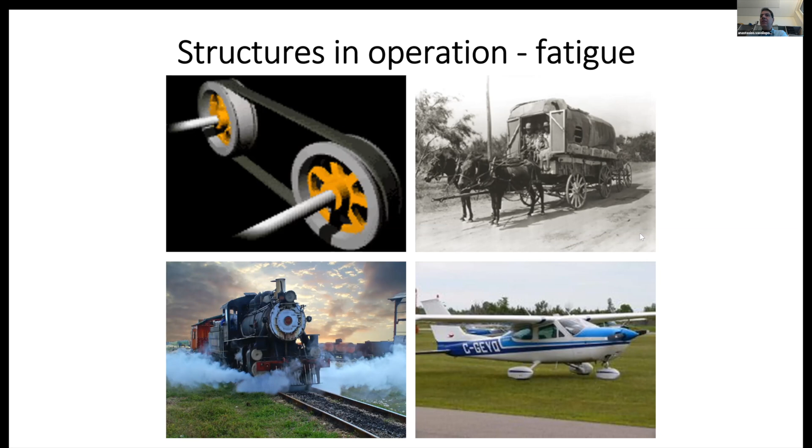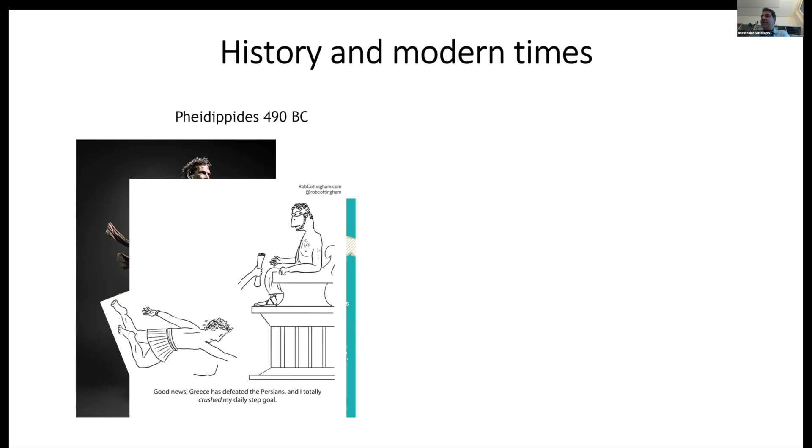He says, Greece has defeated the Persians and I totally crushed my daily step goal. And then he died. So he was a very good runner. Why did he die? Can anyone tell me? Fatigue. Yes, fatigue. But what I mean is, why could he run so many kilometers and die after all this? In reality, in our life we run more kilometers than him, but we don't die because of this fatigue. So what is the difference between these two elements? He was running continuously, not making a break. Exactly, he was running continuously, so he was not getting any rest.

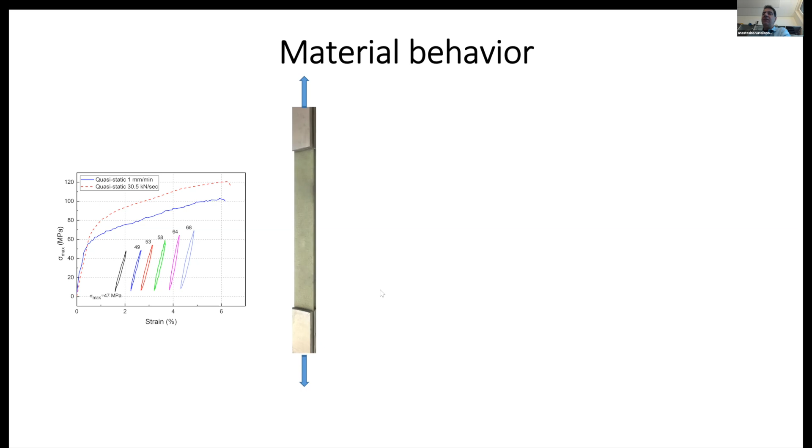Now it's better. Okay. So now we come to the material behavior, and as we said before, materials behave like humans, so they get fatigued. And the investigations that we are doing are exactly to understand this. We torture the materials, and we try to understand their fatigue behavior, how they behave under fatigue loading.

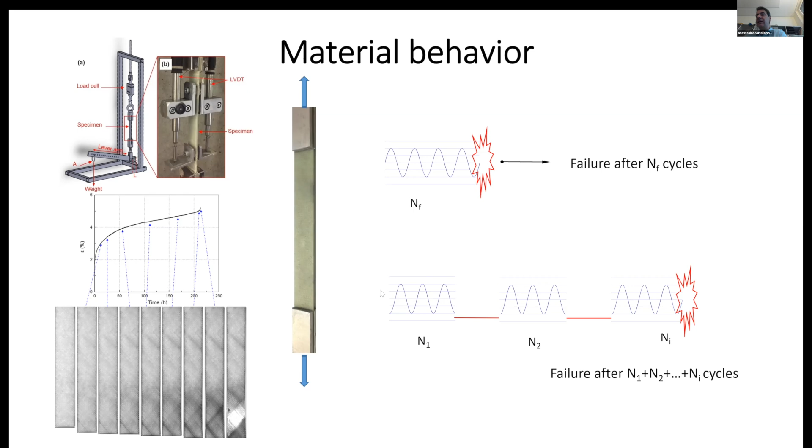And in exactly the same investigations as we did before, we now have the proof that if we load the material in a continuous way, the material will fail after a number of cycles. If we load the material at the same stress level, but we interrupt the loading at specific times, then the material can support many more cycles. So this means that the material itself has a mechanism of relaxation. When we unload it, and this is specifically for composite materials, but we've seen it also in other types of materials, it has a kind of mechanism to relax and regain, if you like, a potential for additional lifetime.

So what is fatigue? We introduced it somehow, but what is fatigue? Can someone answer? I know someone that has had this problem for a long time. What exactly is fatigue? It's accumulated damage under cyclic loading. Accumulated damage. Anyone else?

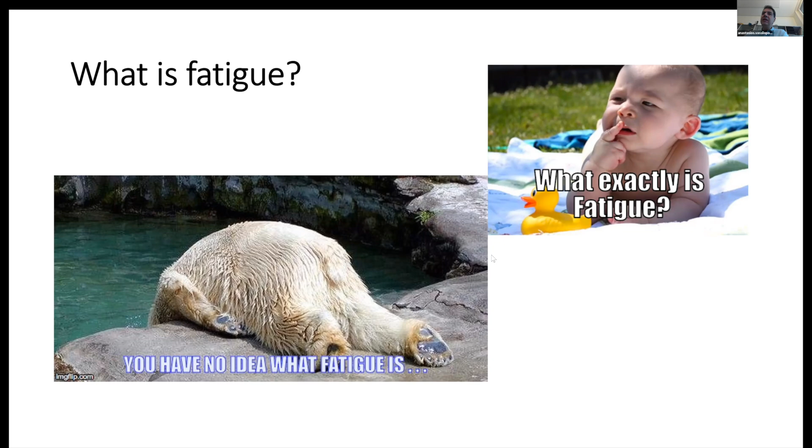Actually, today, although we have investigated fatigue for 200 years, we don't really know what fatigue is. We still try to understand, we still try to realize why fatigue is important, but still we do not know. Fatigue was introduced in the dictionaries, starting from the ASTM, the American Society for Testing and Materials dictionary. We have a definition only in 1946 or something like that, where they define the phenomenon under which properties of a material are deteriorated or degraded due to cyclic loading. Exactly as you said before, we have accumulation of damage,

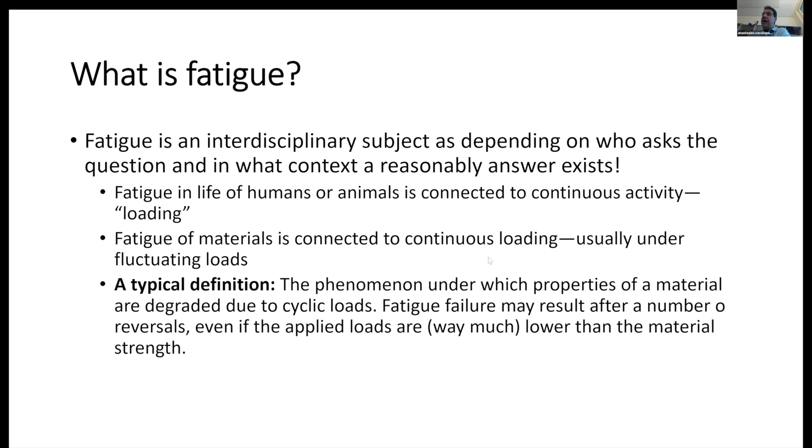not necessarily structural damage, but it might also be viscoelastic damage to the material. And this reduces the material properties during time. So you see, I have now introduced 2 different terms. We have load and we have time. So fatigue is actually a combination of structural damage and viscoelastic phenomena that work together, synergistically, to damage the material itself and lead the material to failure.

So we said failure. I just said before that we have investigated fatigue for almost 200 years now, and still we don't know a lot. This means that even today, fatigue failures continue to occur. We have a lot of examples of failures today that can be attributed to fatigue. And actually, there are a lot of investigations showing that 80 to 95% of structural failures are due to fatigue or fatigue-related phenomena.

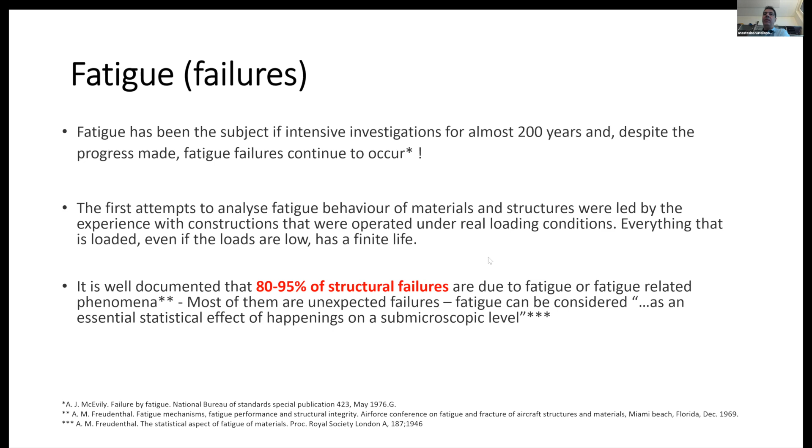We'll see also later on some of this, but only to clarify the terms. So we said 200 years, and if you see, we have the early fatigue failures already observed almost 200 years ago.

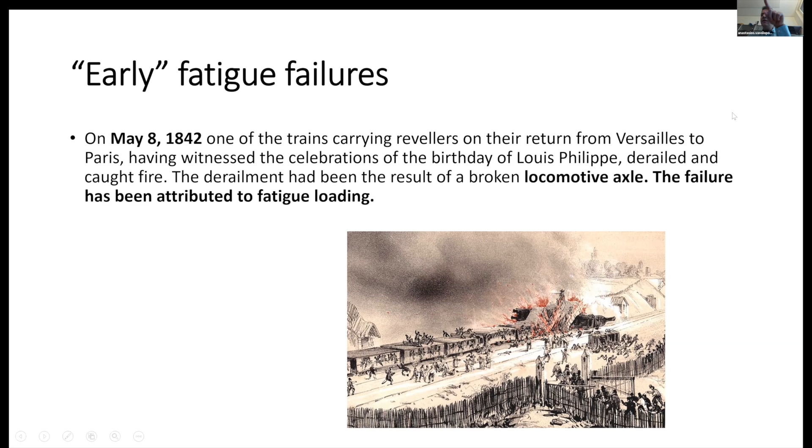One of the first ones was this derailing of a locomotive axle. It was a train that was coming back from Versailles to Paris after having some celebrations for the birthday of Louis Philippe. Actually, Louis Philippe was the last king of France. I don't know if it is related to this accident, but this accident has been attributed to fatigue failure, because one of the axles failed due to fatigue. Keep this date, 1842.

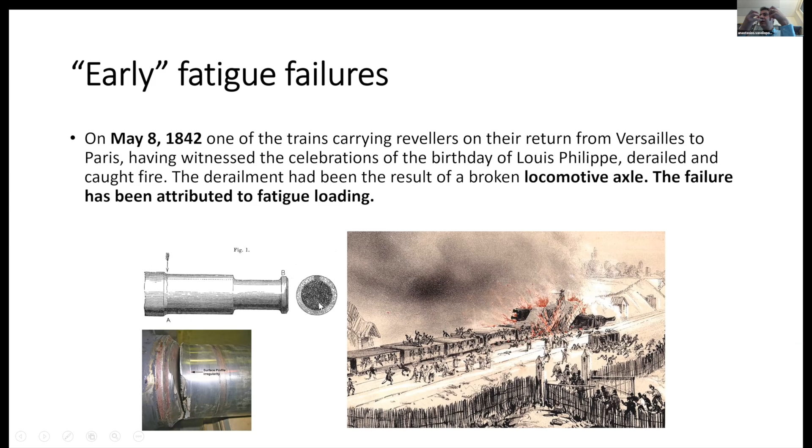So exactly this is what I described before. The axle around has been fatigued. And then when the cross-sectional area was not enough to transfer the loads that it was supposed to transfer, it failed in an abrupt, very sudden way. And that's why we see here this roughness in the surface.

So we've seen also similar failures during World War II with the Liberty ships. A lot of them were very rapidly produced by the United States to supply food and materials, but they had a problem because they were all welded, and there were cracks that started from the corners of rectangular hatches that they had, and these cracks, during the floating in very cold waters, were propagating as fatigue crack failures, and led a lot of these ships to the bottom of the sea instead of the Allies.

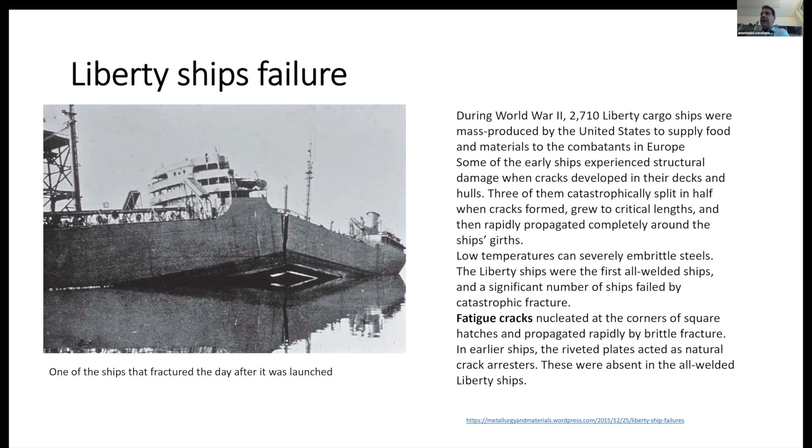We also have this very famous fatigue failure, which is probably the first passenger jet, in 1954, the de Havilland Comet. And there, the problem was exactly the design of the windows. The windows were rectangular, and in the corner of the window there was a crack that was propagating, as the airplane acts as a pressure vessel. So it pressurized and depressurized. So we have stresses at the cell of the airplane. And because of this failure and the post-mortem investigations, the new window frame of this airplane was circular, and now we have these windows that you've seen in airplanes. So what is the message here is that if you see an airplane with rectangular windows, take the next one.

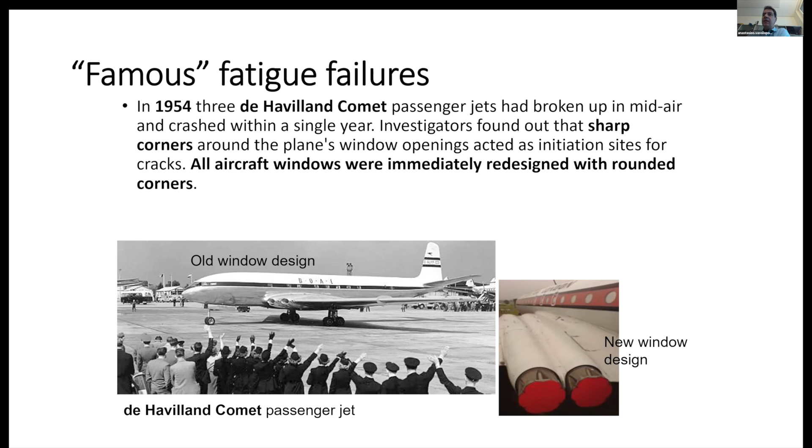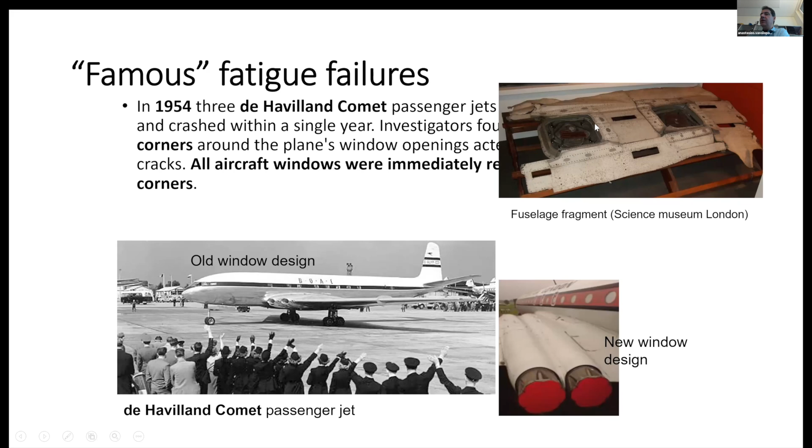So this is what they found once in the bottom of the sea from this airplane. And this is now in the Science Museum in the UK. And they actually found cracks running from the corners of these windows to the fuselage, to the rest of the structure.

And another quite funny, if you exclude one person that lost her life, one steward, is this fatigue damage. It was an airplane 30 years ago that was flying in Hawaii from Honolulu to Hilo Island, that is written there. And actually, oops, the other way around. What happened? The airplane opened like that during flight.

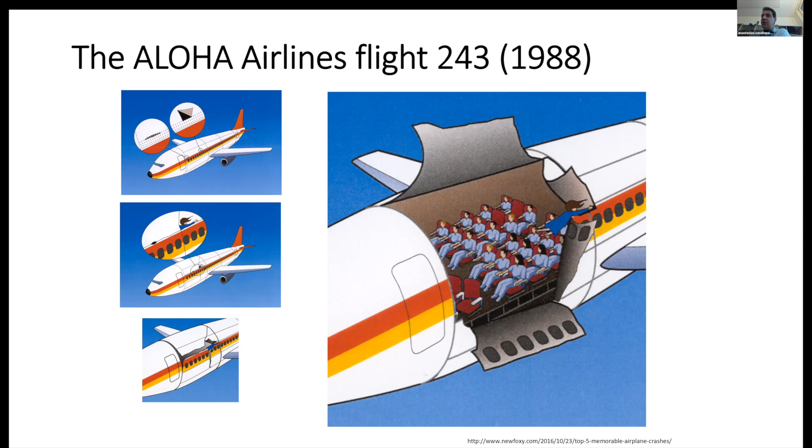And why did it open like that? The investigation showed afterwards, and I have it written here, that the plane was designed for a 20 years lifetime, and it was already 19 years in service, but it was designed for 75,000 flights. And because of the short distance between the two islands, the plane did much more than this. So at the time of the damage, it did 89,680 cycles. So almost 15,000 more than was the design lifetime. And this means that it was pressurized and depressurized 15,000 times more. And that's why it failed. And it ended like that.

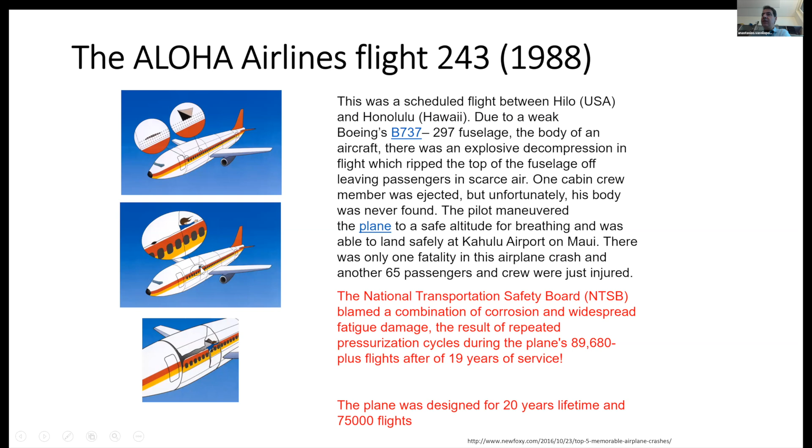Oh. So yeah, it's amazing that they managed to land this airplane. It is amazing that only one person lost her life. It was a steward that was not attached to the seat belts. And this happened because of this pressurization. There was a crack that started, it is shown here, at the corner and propagated because of this

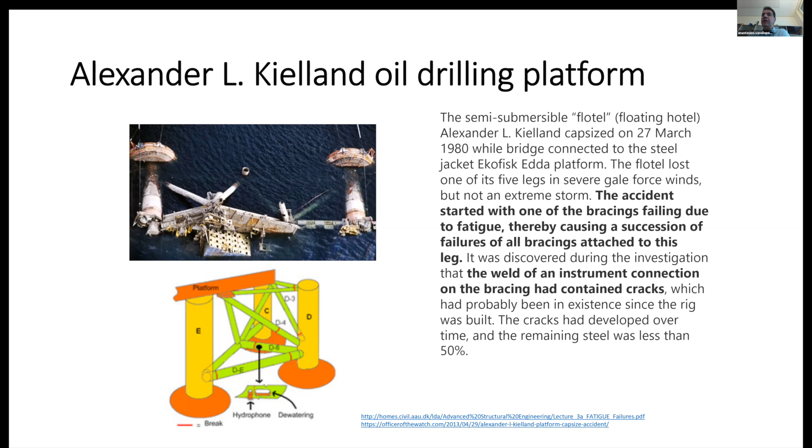And all these are after post-mortem analysis, so it was a fatigue failure here as well. This is what happened. So I told you to remember this date before 1842, because now in 2017 we had exactly the same failure, and this is why I said that after 200 years we don't know a lot about fatigue failure. This is an axle in a train in Australia in 2017, again derailed because of fatigue.

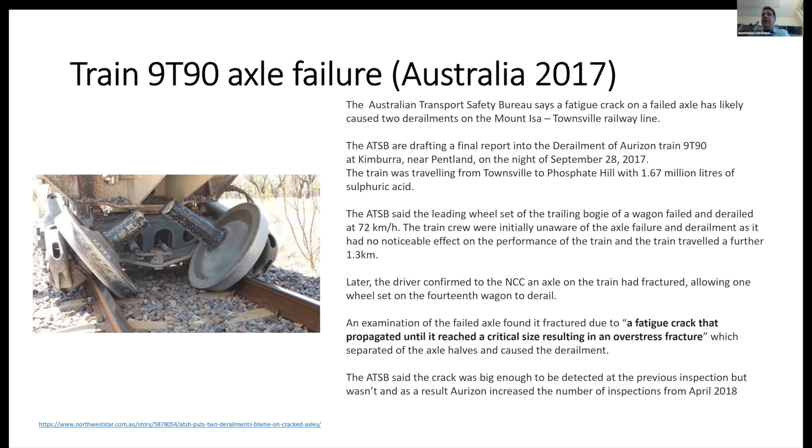Hopefully it was designed in a redundant way and it was not really derailed, because it was also transferring a lot of chemical liquid inside. But still, after 200 years, we have the same failures as before, and we still try to understand why this happens. So I'm going back now to the history of fatigue.

And probably it all started in 1829, when this German mine engineer, Albert, understood that the conveyor chains from mines were failing after some time without reaching their strength. So he reported these observations. And then the same person published the first article on fatigue in 1837, discussing loads and durability of materials. You see that Albert also invented the wire rope. It's independent, it has nothing to do with fatigue.

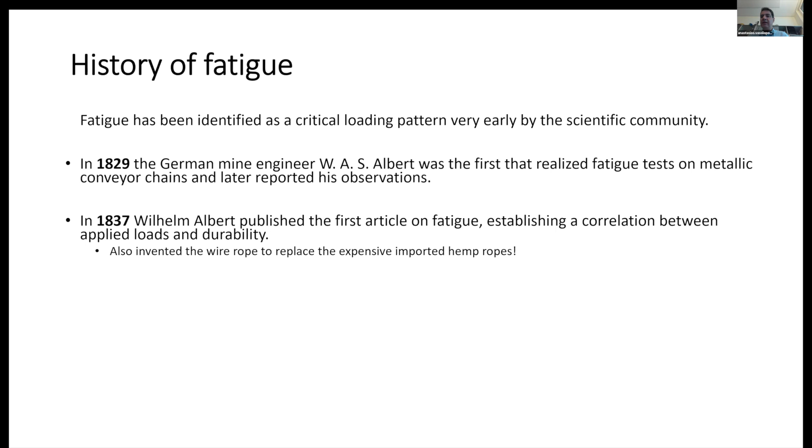But the idea is that engineers and mathematicians of that time were doing a lot of different things. They were not investigating only one topic, or experts only in one area. They were really scientists. We will see it also later on for others. So in 1839, it was Jean-Victor Poncelet in Metz, in the French school, who first used the word fatigue to describe this kind of failure.

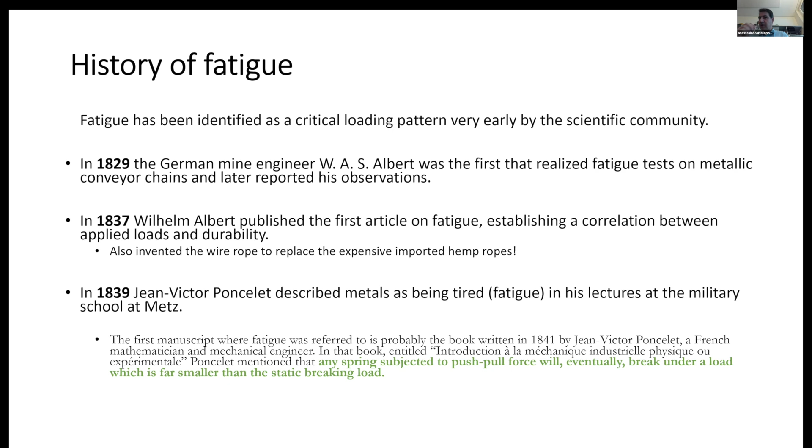And actually, he was very tired. And he wrote in a book in 1841 that any spring subjected to push-pull force will eventually break under a load which is far smaller than the static breaking load. And this brings to mind what we did with the paperclip. We do a continuous loading, much less than what would break it directly. So we can break something by applying a continuous load without even approaching the strength of the material.

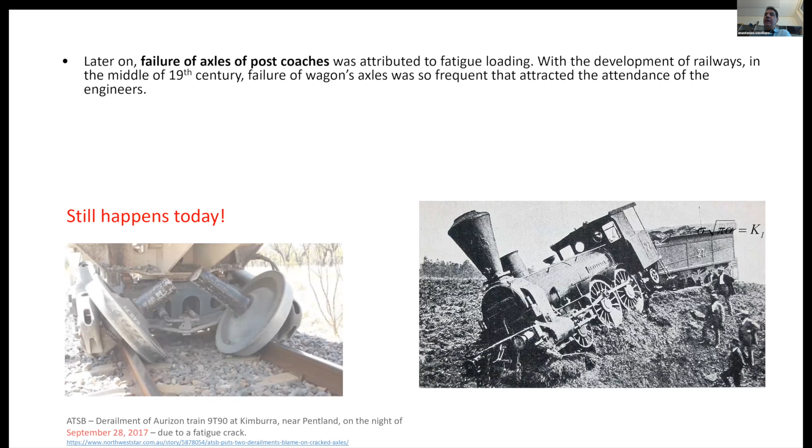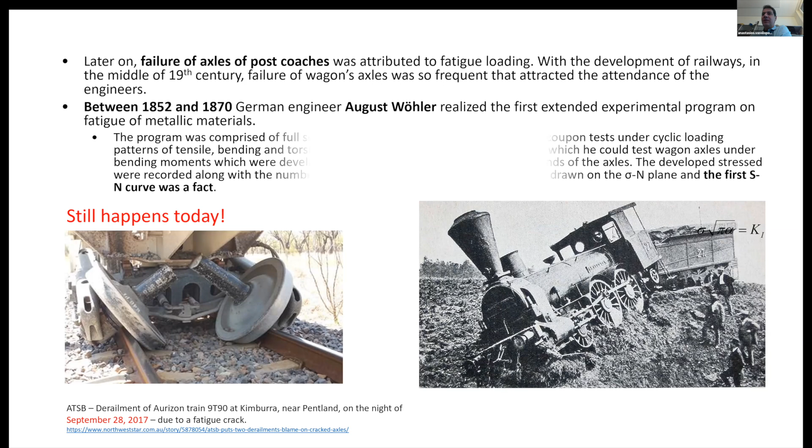So later on, we had a lot of derailing of trains. And as we said, it still happens today. And between 1852 and 1870, a German engineer, again a German engineer, Wöhler, did the first experimental program on fatigue of materials. Germans at that time were good, not like the football team of yesterday. And what he did actually was create the first SN curve.

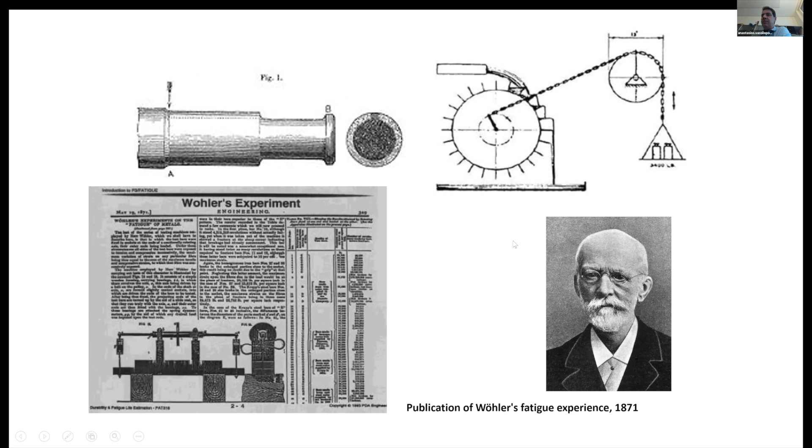So this is exactly the publication of Wöhler. This is his paper in 1871, where he described what he was doing. He had a very simple rotating machine, where he was changing this load here to create different bending moments in the structure. And then he reported his results. This is what he did.

What else? Material discontinuity. Speak loud, please. Maybe there is a change in the diameter of the rod. Sorry, I didn't hear this one. He said that maybe there is a change in the dimension of the rod. It can be that the dimensions are slightly different, exactly, when we manufacture the material.

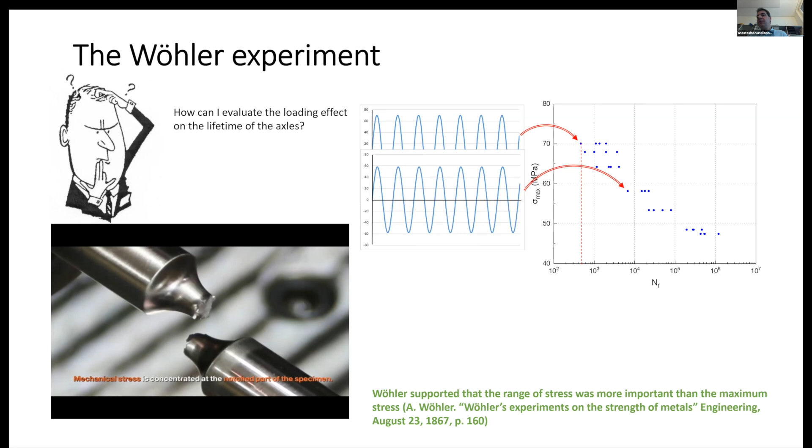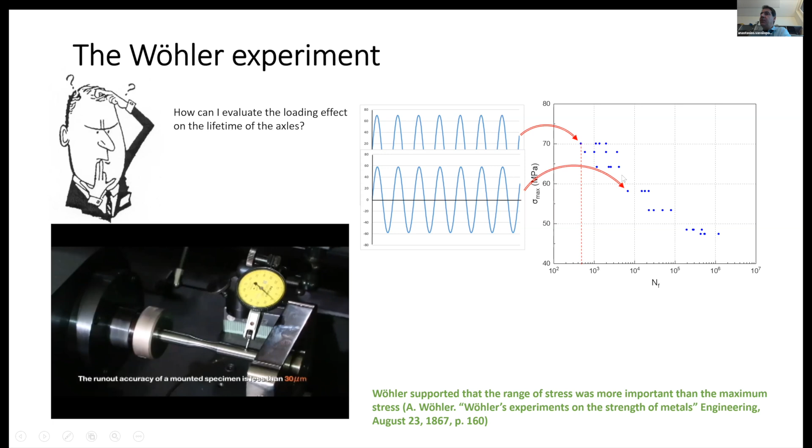So if we want to continue with how to derive these curves, we do a test at a lower stress level, then we define the cycles at the lower stress level and so on, and we define this SN curve. And then this same curious guy started thinking, what about intermediate stress levels? Because initially we tested and reported the test results, but we don't know what happens in between.

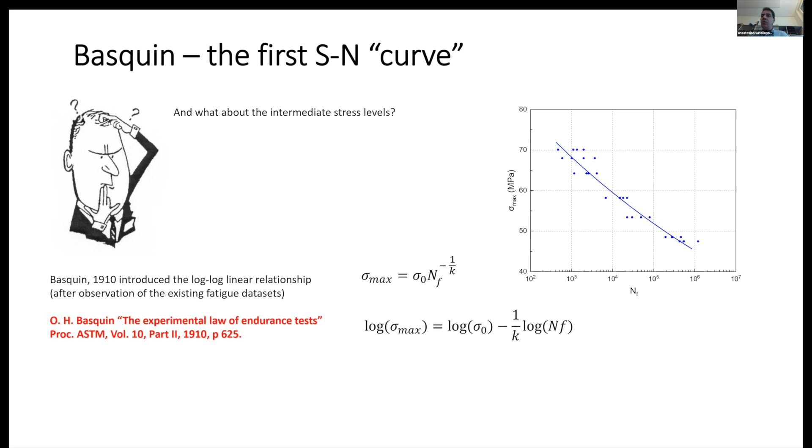And then in 1910, so 100 years before today, another engineer, Basquin, introduced the experimental law of endurance tests, as they called it, and it was reported in the proceedings of the ASTM in 1910. It is actually the logarithmic or log SN curve. It's an equation saying that if we plot the maximum stress or the stress parameter against the number of cycles in a double logarithmic scale, then it is a line that can simulate the behavior of this material. And guess what?

We still use the same equation today. This is the basic SN curve equation that we are using even today for composite materials and even for metallic materials. And although it is a fitting equation that can be estimated by linear regression, it has some physical meaning. This is reported in one paper from Freudenthal in 1946. You can read that the relation expresses the effect of a general mechanism of fatigue and is more than purely empirical, which is the best fit. It's suggested by the circumstance that it is valid for practically any kind of material, whatever its deformation performance. So it has some basic physical background.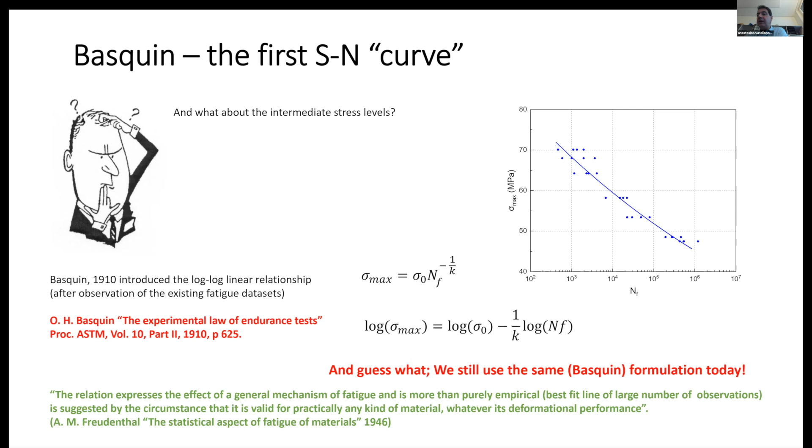So up to this point, we investigated how we define the material performance, but we didn't say anything about the mean stress effect. The testing that we do can have a different mean stress. Do you have this idea in mind? What does a mean stress mean, and how does this affect the fatigue life?

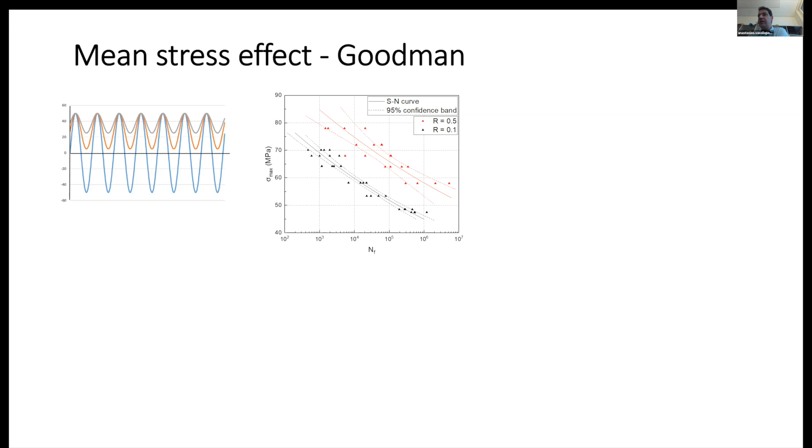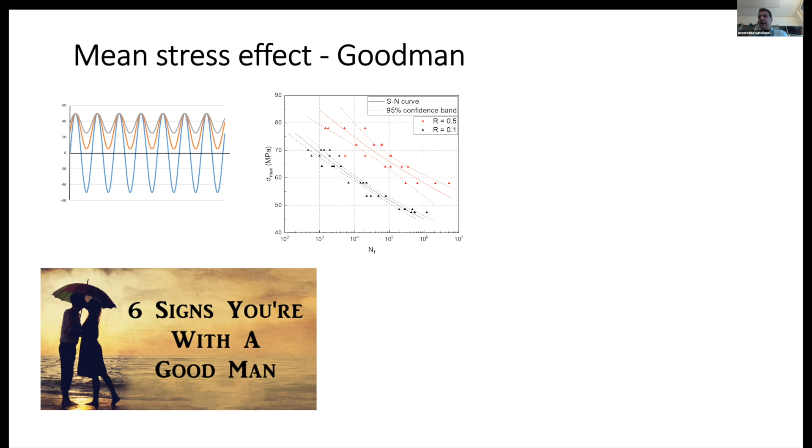So one thing that we can do is test the material at any possible combination of R ratios. One other thing that we can do is search for a good man that can help us solve this problem by having an equation. And actually there was a good man called Goodman. He lived between 1862 and 1935. He was a professor in civil and mechanical engineering at Leeds University.

And he suggested that there is a relationship between sigma alpha and sigma m. Sigma alpha, you remember, was the amplitude, and sigma m, and also the strength of the material. He suggested that it was a linear relation between these. So having this means that we can interpolate between known R ratios and estimate the lifetime of a material at a different R ratio, a different condition. This was introduced in 1904, so 100 years ago. Today we know that it does not work well for composites. It is still working well for metals.

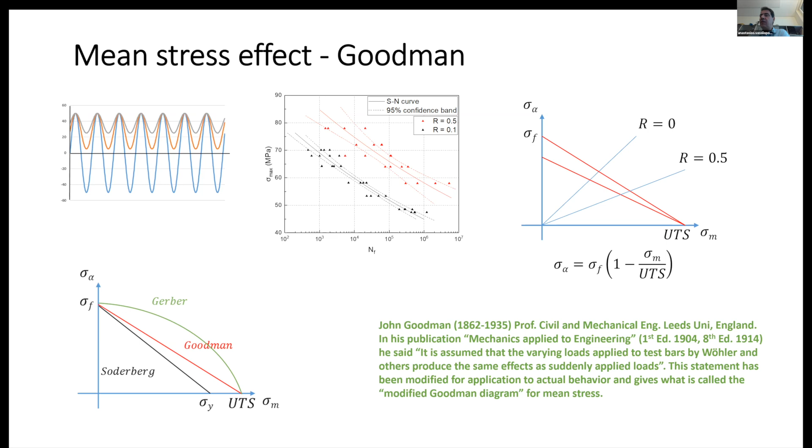In between, we have other cases, other people, instead of Goodman, not so good men, like Gerber or Soderberg, that introduced nonlinear equations for this. And today we know that for composites, we introduced the so-called constant life diagrams that are relevant to the Goodman diagram, but they have different formats to simulate better the behavior of composite materials. So whatever we said up to now is related to continuous loading.

You remember we have a waveform that is going up to failure, but in reality, we know that the loading is variable. If you go outside, you see that wind has a variable waveform, and efforts have been allocated to the investigation of this variable amplitude loading quite early, starting in 1925 with Palmgren, who developed a linear cumulative damage model to estimate the damage because of different blocks or variable amplitude testing. And you see again, he has also introduced a four parameter for the S-N curve. Gassner, later on in 1939, emphasized more the variable amplitude loading.

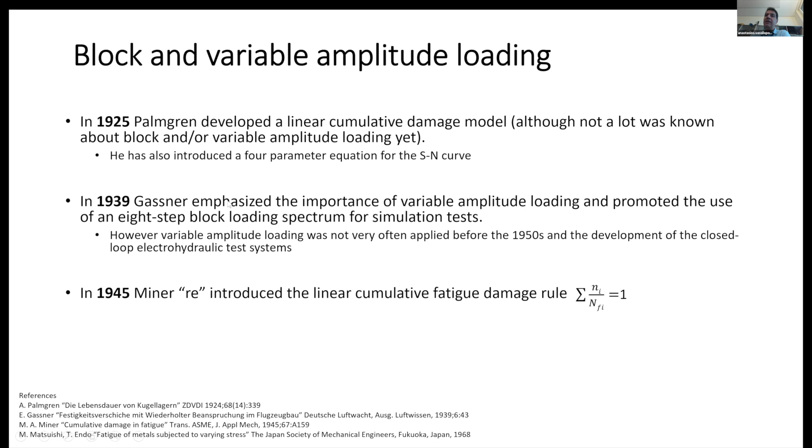1945, then we have Miner. Probably you remember Miner. You've seen the Miner rule. This is the Miner rule. Actually, Miner reintroduced the linear cumulative damage rule from Palmgren. And that's why in some books that are quite fair with Palmgren, they say the Miner-Palmgren rule, and not only the Miner rule. And we had also in 1968 some Japanese scientists, first of them Matsuishi and Endo, who introduced the rainflow counting.

So the idea is how to measure how many cycles we have in every variable amplitude loading that we meet in reality. And they were inspired by the way that raindrops fall on a pagoda. And so it comes down, and this is exactly what they do in cycles. When it comes down like that, they count a cycle in between this. So that's why they call this method the rainflow counting method, because it measures the cycles in the way that raindrops go down the pagoda roofs.

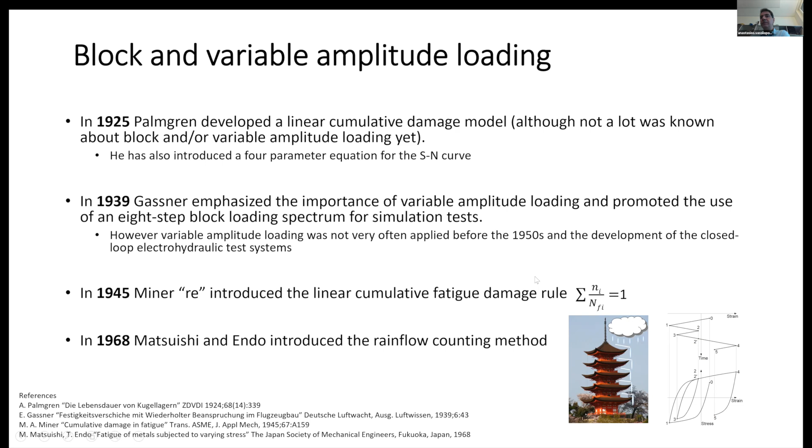And in parallel to these investigations, which we can also call phenomenological or empirical investigations, we have also fracture mechanics modeling. It is related to cracks. We investigate the crack and how the crack propagates. We have the first introduction of fracture mechanics in 1920 by Griffith, going one step further in 1957 by Irwin, and then it went to more complicated situations like variable amplitude loading. Between the 1960s and today, Schijve, this professor at TU Delft,

emphasized the testing of aircraft based on variable amplitude loading. You will see also a gradual change between continuous loading and variable amplitude loading, and this is also because of the change in the machines and the controllers. Until 1950, 1960, we couldn't do complicated loadings. We didn't have the computational possibility in controllers, in machines, to control variable amplitude loading. That's why you cannot find these types of loading earlier. And only after the 1960s, 70s, we see the first publications on these variable amplitude investigations. And then here, I have also 1961, where Paris introduced the fatigue crack growth rate in fracture.

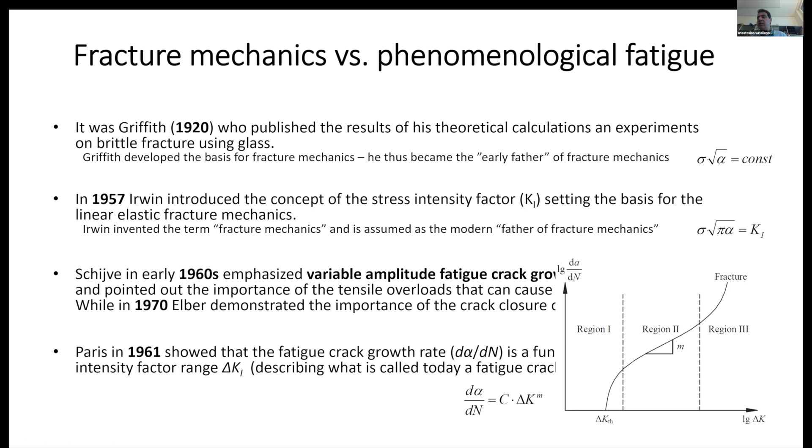And he was the first that suggested this quite famous today FCG curve, the fatigue crack growth curve, where he suggested that this middle region here, region 2, has a continuous slope. It's like a line. And this is what we call today the fatigue crack growth curve.

So up to now, we didn't say anything about damage. We said, okay, the materials behave like that. We have equations to simulate the behavior. But it was quite early, in 1900, for example, where Ewin and Humfrey started investigating the damage of materials. They used at the time optical microscopes to investigate failure mechanisms in materials. In the 1950s, the scanning electron microscope brought a great boost in these investigations.

And today we have DIC measurements, we have X-ray tomography. X-ray is exactly the same as we do in medicine. When you break a bone, you go to the doctor, they scan your hand or leg or whatever, and they can investigate and check what happens in your body. And the same happens today with X-ray of materials. You see on the right hand here the investigation of, so this is X-ray on an adhesively bonded joint with pultruded composite elements on both sides. And in the middle, this dark one is the adhesive. And there is also a crack, so you can see the crack. And these are outputs of X-ray tomography on this joint.

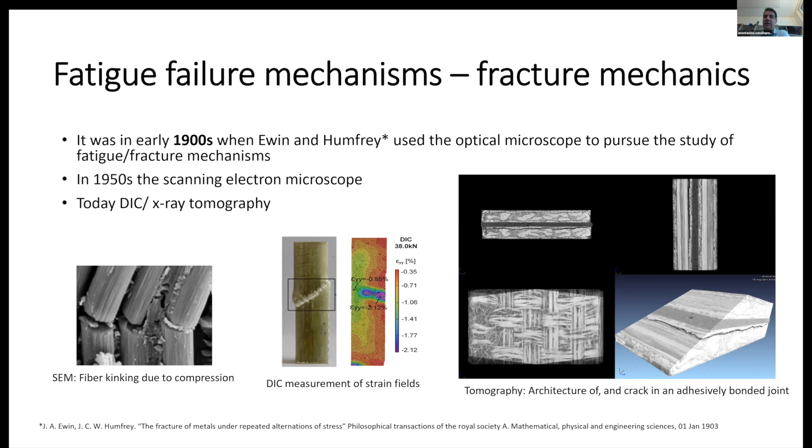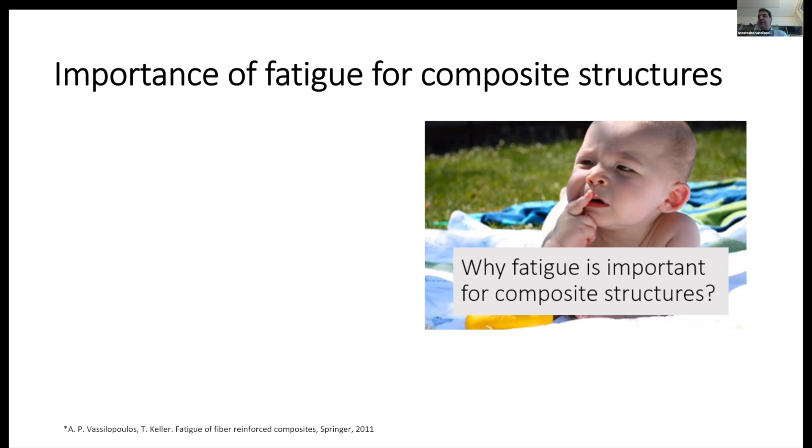So up to this point, we didn't say anything about composites, and our baby here is curious why fatigue is important for composite structures. And there is actually a huge list of reasons where fatigue is important for composite structures. First of all, in composite bridges, for example, someone can say that in a concrete bridge fatigue is not the most important parameter that we have to investigate. But when we go to a composite bridge, the bridge itself is so much lighter that the traffic loads, the live loads, become very, very important compared to the dead loads, so the load because of the weight of the bridge. And this is one of the reasons for composite fatigue becoming more important than fatigue of other materials.

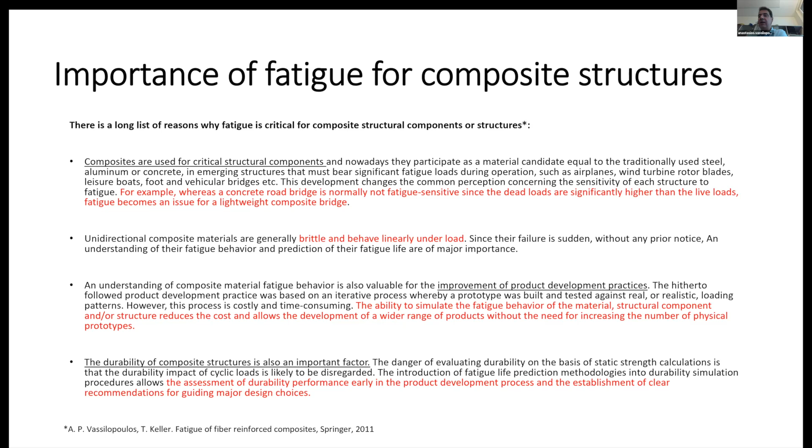Composites also, you probably know that they are brittle and behave linearly under load, which means that they fail suddenly. So we need to know what happens in the material structure before reaching the failure. And this is why we have to investigate fatigue and be able to model the fatigue behavior, to predict the fatigue failure. Also, fatigue investigations and prediction tools help to reduce the cost of structures because we don't need to make physical prototypes. And of course, as you all know, the durability of structures is very important. And this is related to the second point, that they are brittle and behave linearly up to failure. Because if we know how to develop models or predict the durability behavior, then we can also respond to the question when the material will fail. So this is one of the reasons that strengthens the others, and there are more than what are listed here to show that fatigue is much more important for composite structures.

One investigation that we did a couple of years ago, we saw that there are a lot of publications on fatigue. You see, in 1955, there was a publication from Hulbert, saying that there is almost nothing about fatigue. In 2010, you see, there were almost 10,000 publications. And in 2020, we have more than 18,300 publications, which means that we publish more than 800 papers per year on fatigue. And in fatigue of composites, we investigate in these publications.

Mainly, you see investigations about these points that I point out in the left side: the R ratio and frequency effects, the viscoelastic behavior during fatigue, influence of the constituents, fiber architecture, different materials. Now, a lot of people work on hybrid composites where we mix glass and carbon. Can you tell me one application where hybrid composites are used a lot?

We use this hybridization. Speak loud. Aerospace industry. An example? Again.

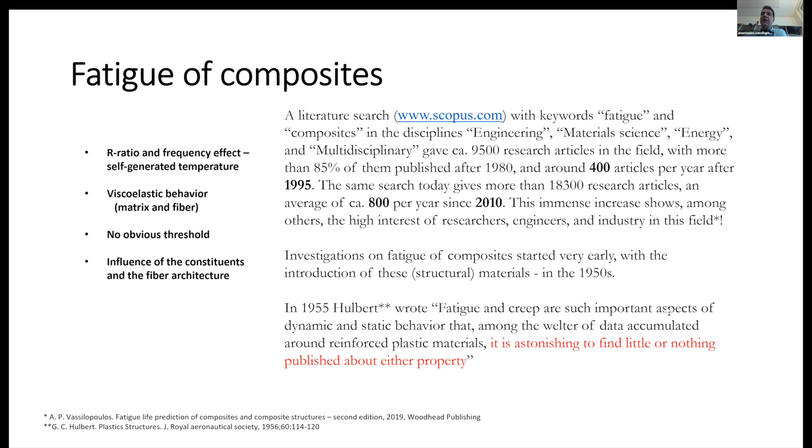So I'm coming back to these simple questions here. What is the R-ratio effect? We discussed a bit before about this. Here there is another video, but there is no need to show it now. It's only fatigue failure. So the R-ratio effect, as we've seen before, is the effect of the mean stress. This is what we call the R-ratio effect. And as we said before, we cannot use anymore the linear Goodman diagrams because they do not work for composites.

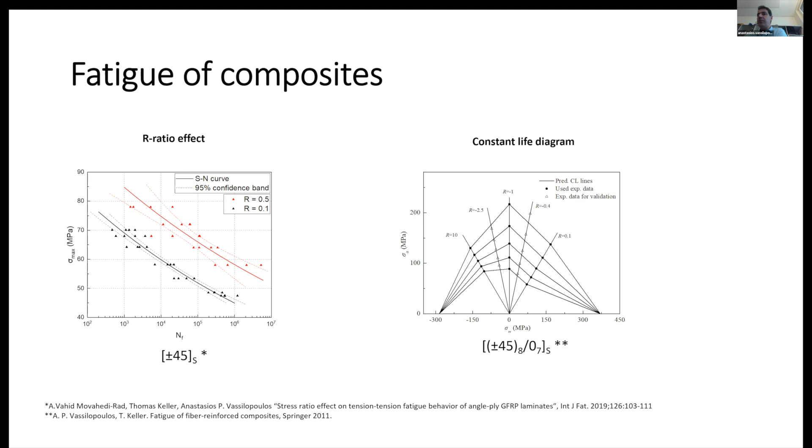How do we say that they do not work with composites? We have experimental results that show that these equations that are due to the linear diagrams are not anymore valid for composites. And we have other types of formulations that we call the constant life diagrams, like this one. We also have a viscoelastic behavior of composites.

And we see these are the hysteresis loops of the material. And we see a drop of the stiffness. So the drop of the slope of this loop shows that the stiffness of the material reduces. And also we see an increase of the area. The area inside the loop is assigned to the dissipated energy. So the larger the area, the more energy we dissipate, which means that we have damage in the material, because the dissipated energy is due mainly to the friction between the material molecules. When we have damage, it means that we have cracks, and this friction increases. And that's why this area is increasing.

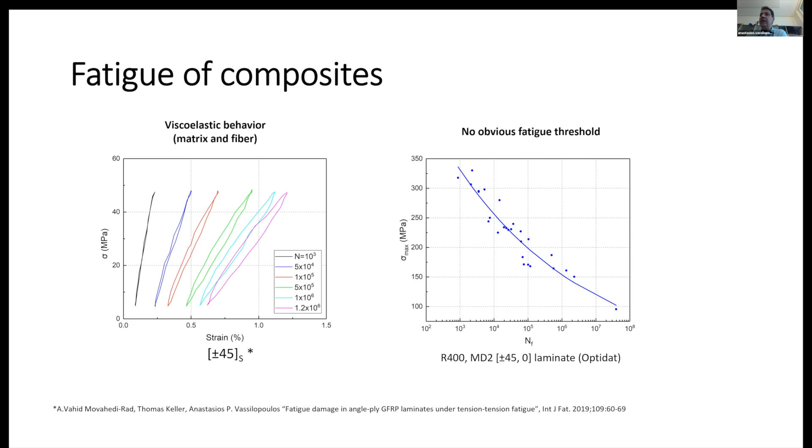In composites also, what I mentioned before but briefly, we don't have a fatigue threshold. You remember in metals, you have a line like that and then a line like that. After a certain stress, the material behavior does not degrade anymore. In composites, it is documented in the literature that we don't have this fatigue threshold.

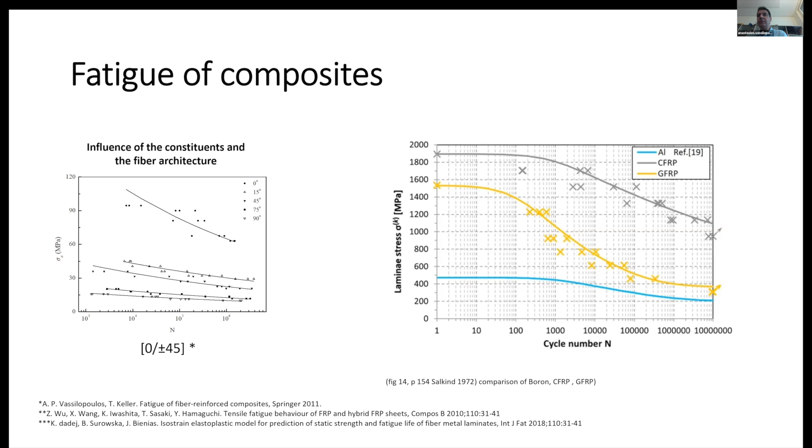And then we have fracture mechanics. We have the material with a crack somewhere, and the crack propagates because of loading. We can have loading which is due to opening of the crack, which is called mode 1 loading. We can have loading where we have sliding of the crack, which is called mode 2 loading. And in a lot of cases, we have mixed mode loading conditions, where we have a mix of opening and sliding.

This is a mixed mode fatigue test of a sandwich panel. So actually the beam of a sandwich panel. What you see inside here is balsa wood. Outside you have glass substrate. And this is how it works. And what we see here also is some fiber bridging, fibers coming out. So if you are interested in fatigue, you have to be patient and wait until this structure here reaches 2-3 million cycles. And at the same time, you have to be patient to go there and measure the crack.

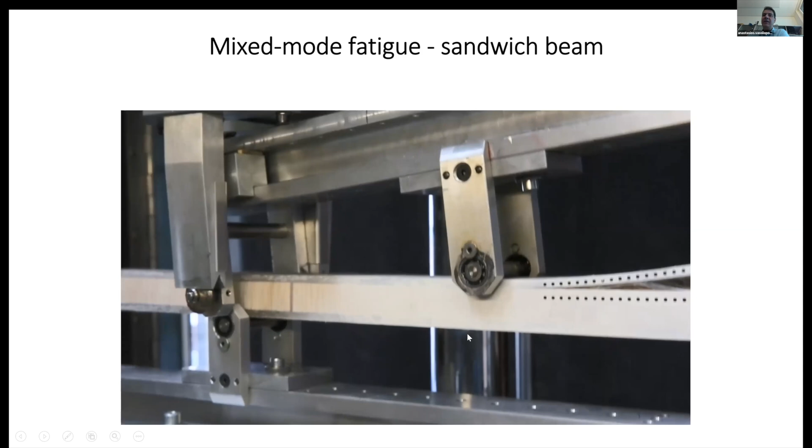Okay. Did you like this test? Tassos, we faced some problems seeing the video properly, because I think Zoom, if you don't change to optimize video mode, I don't know where this option is, we can see the video with a lot of pauses. Okay, doesn't matter, we caught it. Okay, the idea is that you have this video. Yeah, you get the idea.

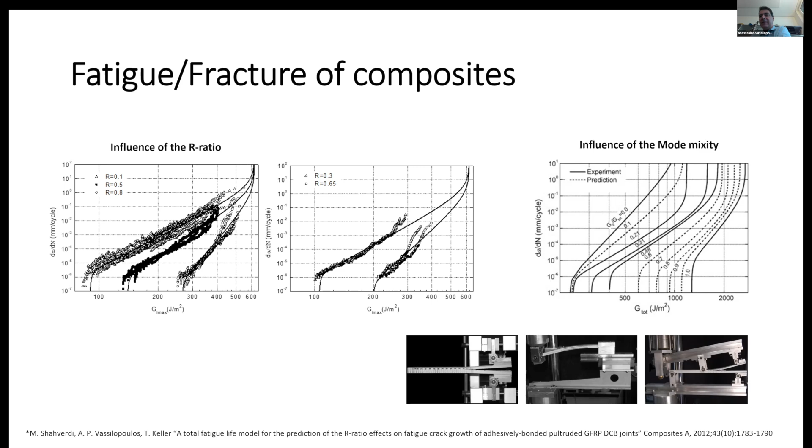Yes. So to get this video and to get results that give you curves like this, you need to run the test for 4 or 5 million cycles. At 5 Hertz, 5 million cycles means around 10 days. So be patient enough to be there 10 days, measuring the crack, investigating if the test is progressing well. Cross your fingers that you don't have a failure in electricity or whatever else. And this is how we do fatigue investigations.

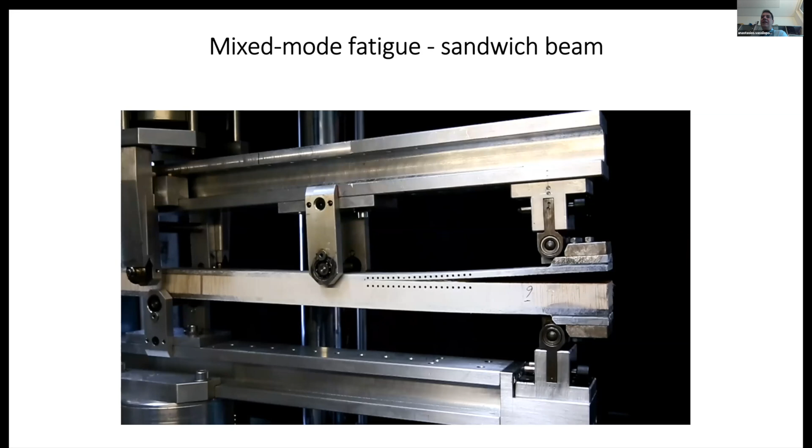I will conclude here this lecture by saying that I hope now you understand that fatigue failures are the most common in components. We know that fatigue is a big problem in engineering design. We don't know a lot about fatigue, and this is good because we can still work on this until our retirement at least.

Fatigue failure is a combination of different events. We have effects of course of load, environment, the geometry, the material architecture, material, as you very nicely said, manufacturing defects, a lot of complicated events that happen there, and that's why fatigue is still a problem, and we cannot give commonly accepted tools for fatigue design yet.

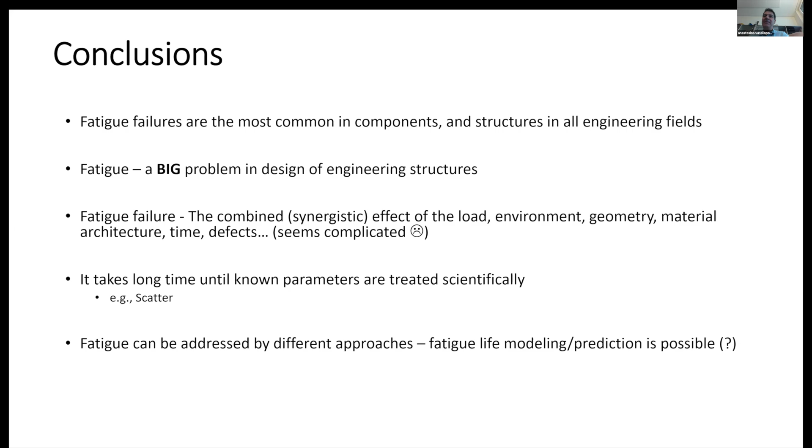Still, although we don't know a lot, there are a lot of different approaches in fatigue, and actually now there are some methods, some guidelines, if you like, to design fatigue of composites, but it's not yet there. So yeah, for those interested, a PhD in fatigue might be a very good choice. And with this, I think I finished. I hope you enjoyed. And I will be at your disposal if you have any questions.